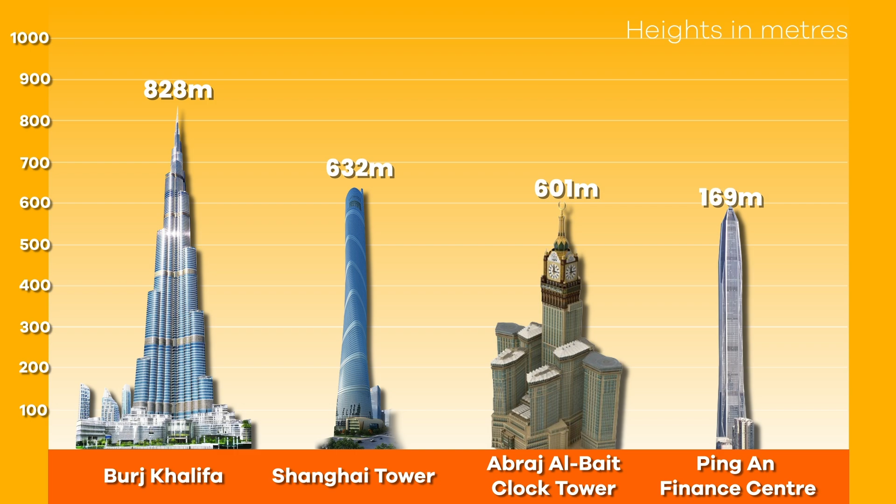The Burj Khalifa in Dubai stands at 828 meters, soaring as the current tallest. Then there's the Shanghai Tower in China, stretching up to 632 meters. Abraj Al Bait Clock Tower in Mecca holds the title for the tallest building in Saudi Arabia at 601 meters. And Ping An Finance Center in Shenzhen reaches 599 meters.

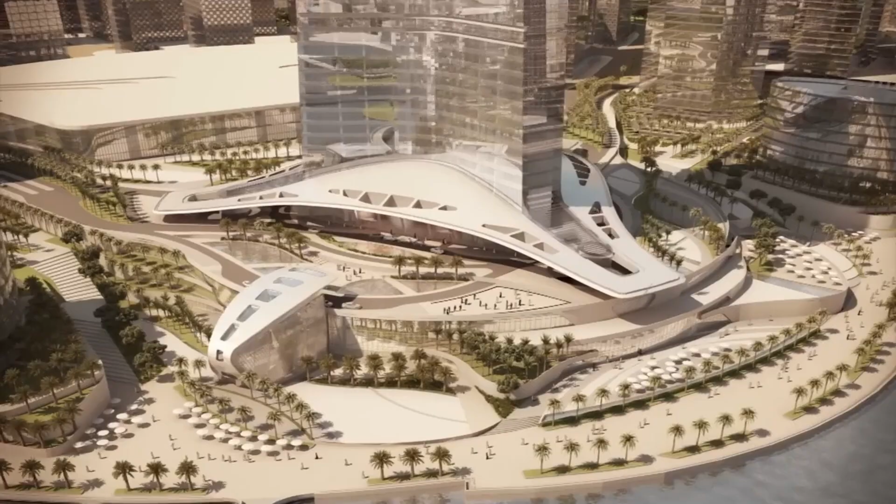Now, imagine all of that, but even taller. Saudi Arabia's Jeddah Tower is set to break every record by rising over 1,000 meters into the sky. That's nearly as tall as 3 Eiffel Towers stacked on top of each other. But here's the twist. The Jeddah Tower's construction stopped midway. What happened? Can a tower this massive even be legally built under current building codes?

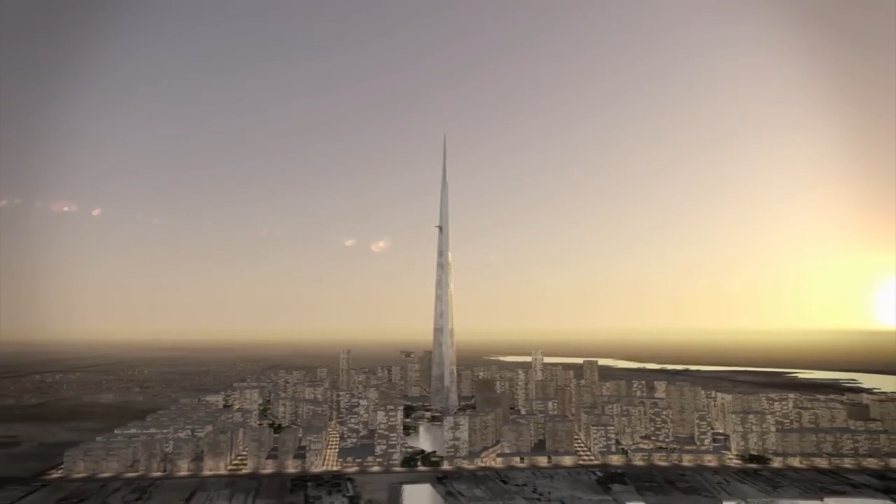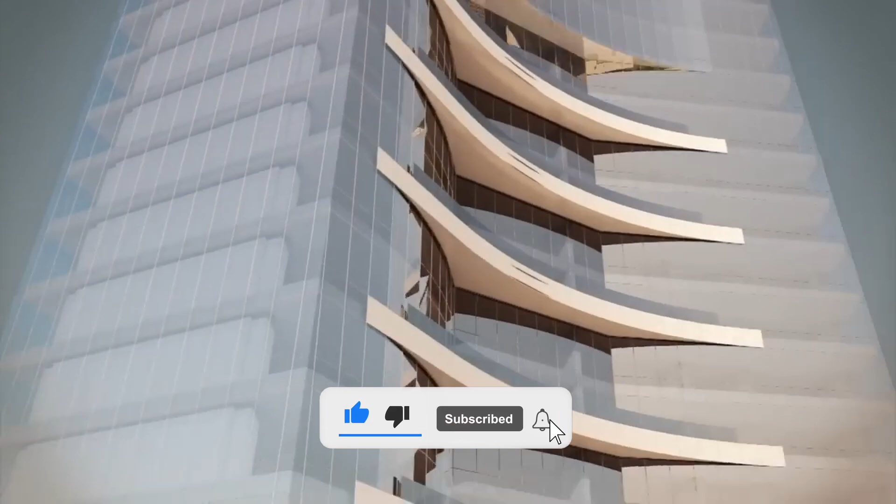Don't worry, we'll get into that because today we're diving into the rise and fall and the surprising comeback of the Jeddah Tower. So, let's jump right in and uncover why this tower could change everything or crumble under its own ambition. Let's go. Let's go back to where it all started.

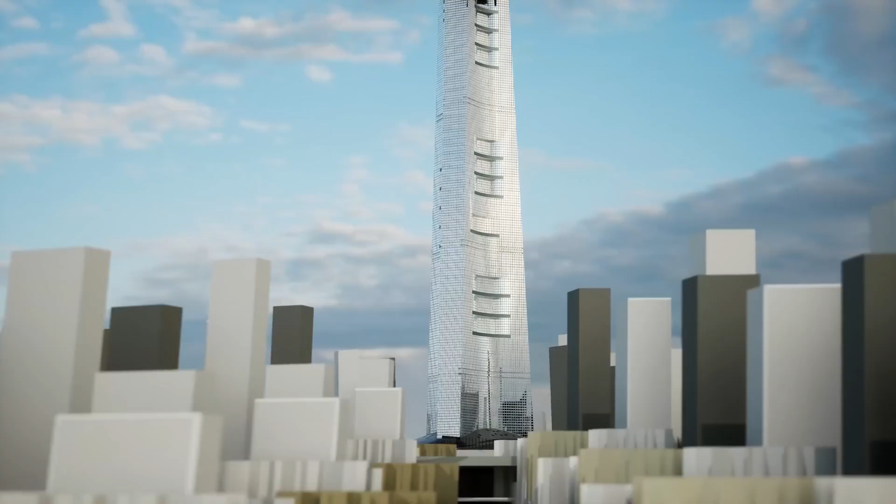It was the mid-2000s, and Saudi Arabia wanted to build something extraordinary, a beacon for Jeddah that would redefine skylines forever. Initially, whispers of a mile-high skyscraper stirred imaginations, but reality quickly set in. Soil testing in 2008 revealed concerns about whether the ground could support such an audacious height. The idea seemed almost impossible, and doubts spread like wildfire. Was this project doomed before it even began? The media thought so. Despite the skepticism, the project soldiered on.

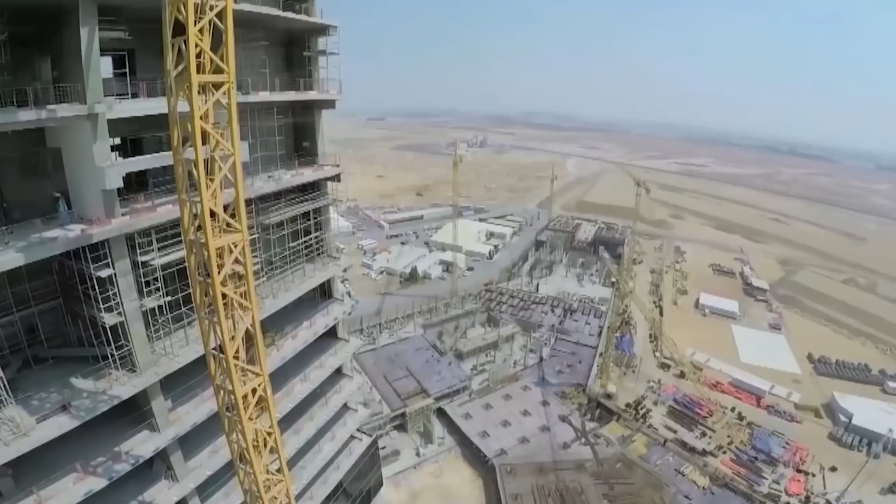By 2010, a big-name architect entered the scene, Adrian Smith, the man who helped design the Burj Khalifa, the tallest tower at the time. And if anyone could push the limits of engineering and design, it was him. His team at Adrian Smith plus Gordon Gill Architecture beat out world-class competitors to land the job. They redefined the vision, not quite a mile, but still 1,000 meters high. A kilometer into the sky. A tower that would dominate not just Jeddah, but the entire world.

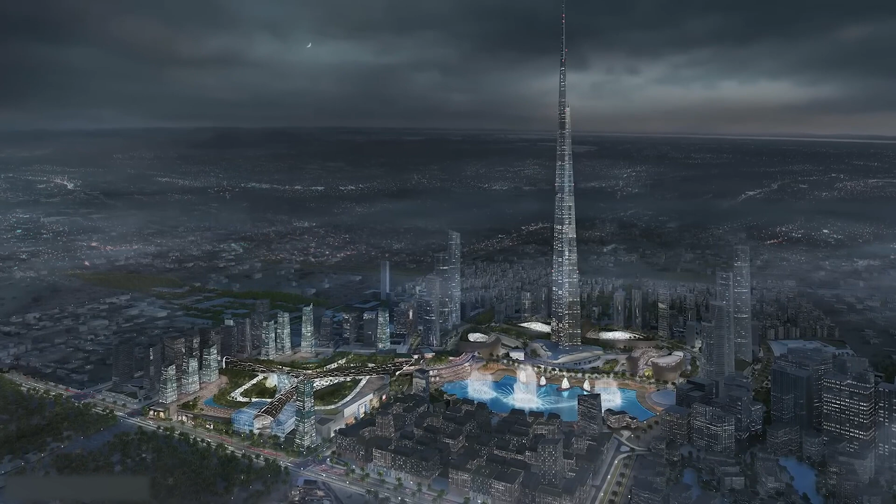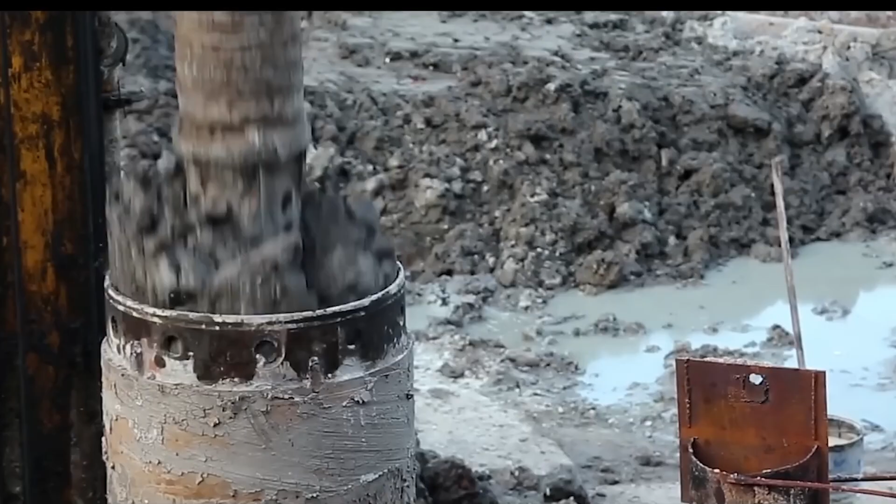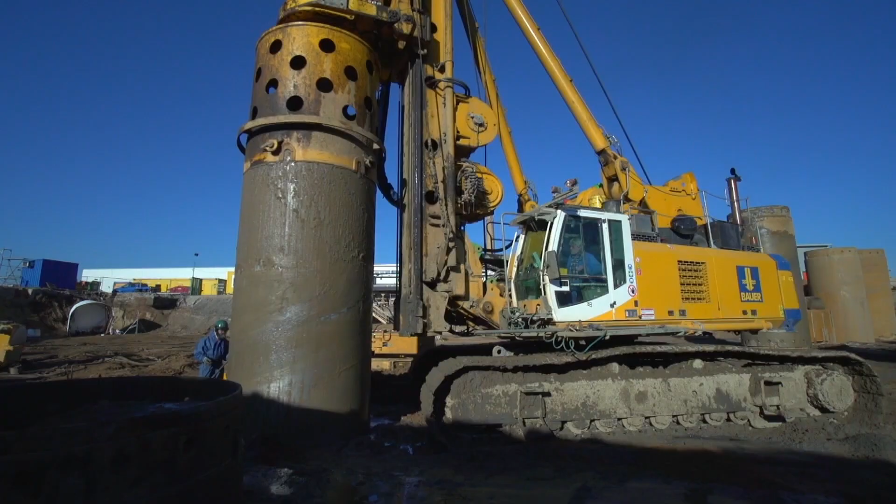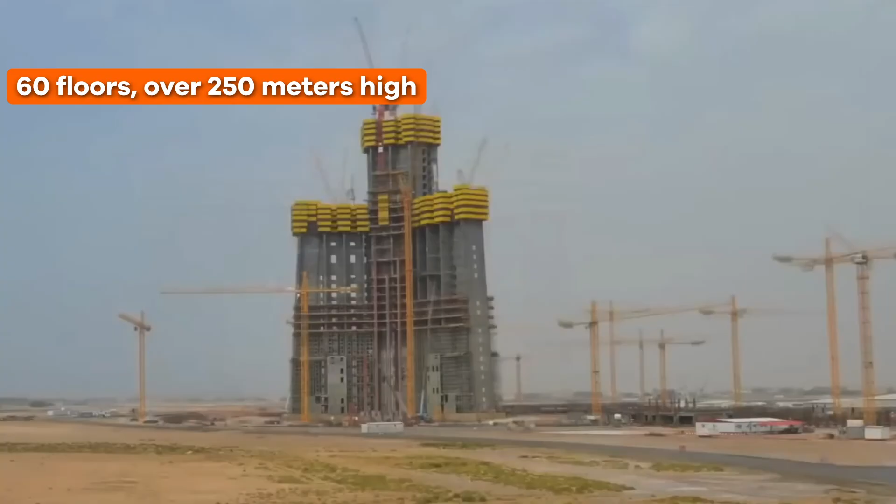It didn't take long for momentum to build. Contracts were signed. The Bin Laden Group, one of the biggest construction firms in the region, was brought on as the main contractor. In August 2011, the first concrete plans were in motion and the groundwork was set to begin. Massive piles would dig deep into the soft bedrock, designed to hold over 900,000 tons of weight. By 2013, Bauer, a German contractor, was hard at work drilling the foundation. Slowly, the dream was coming to life. And by late 2017, the central core reached an impressive 60 floors, already over 250 meters high.

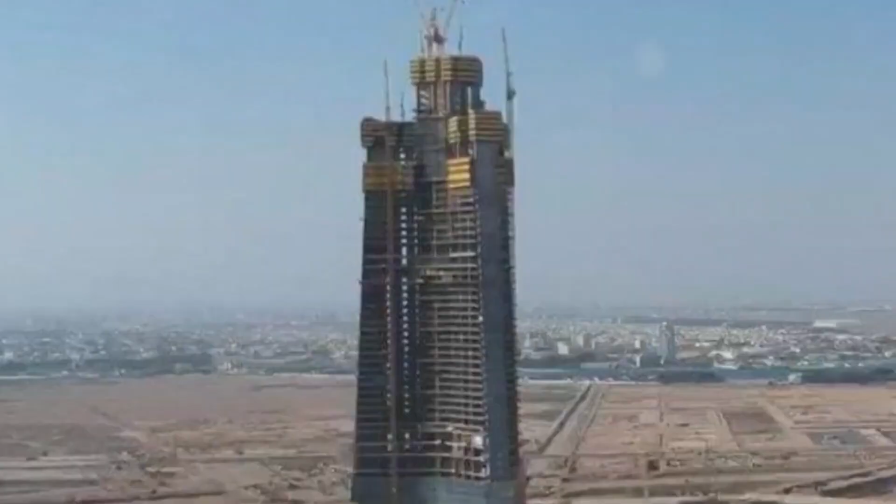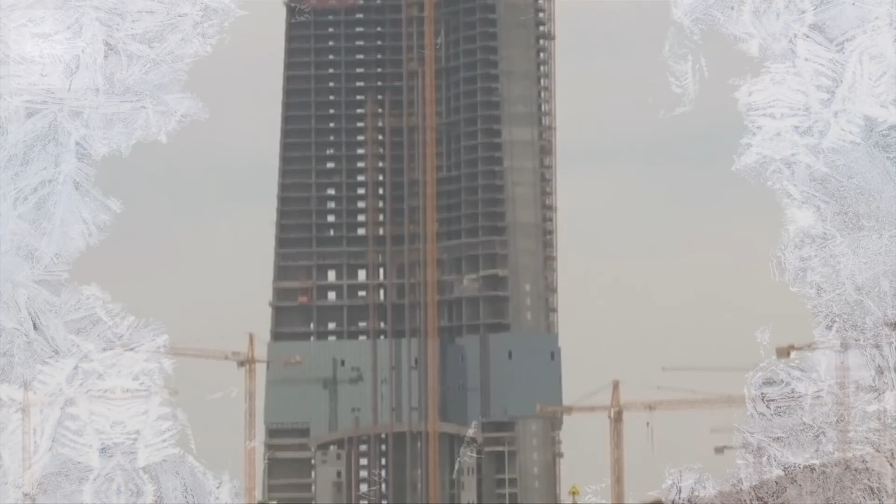But then came the first major storm. The Saudi purge of 2017 hit some of the key players in the project. Kingdom Holding Company, one of the major stakeholders, faced internal disruptions. The primary contractor, Saudi Bin Laden Group, also took a hit. Suddenly, the progress slowed. And then in January 2018, everything came to a grinding halt. The towering concrete core sat frozen, like a forgotten relic of ambition. By 2023, the Jeddah Tower became a symbol of what could have been. Could it ever rise again?

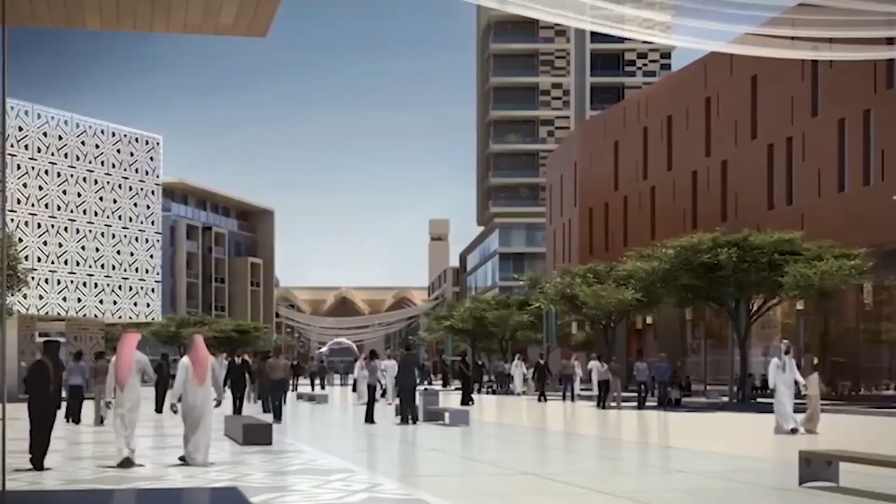Then came the unexpected. In September 2023, a spark of hope reignited. Reports revealed that Jeddah Economic City had restarted the project, calling for proposals from contractors across the globe. 14 firms from the Middle East, Europe, and China were given the chance to finish what seemed impossible. And then, just recently, in 2024, the architects confirmed it. Construction had resumed. Completion was projected for 2028 or 2029.

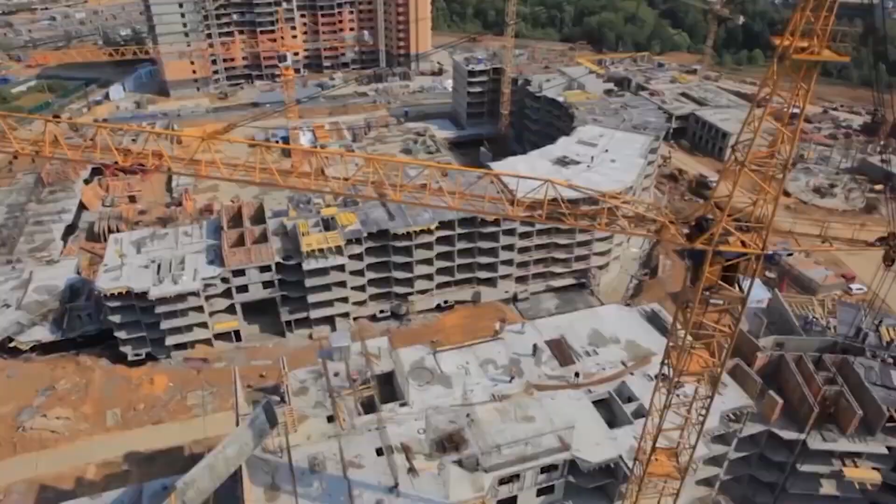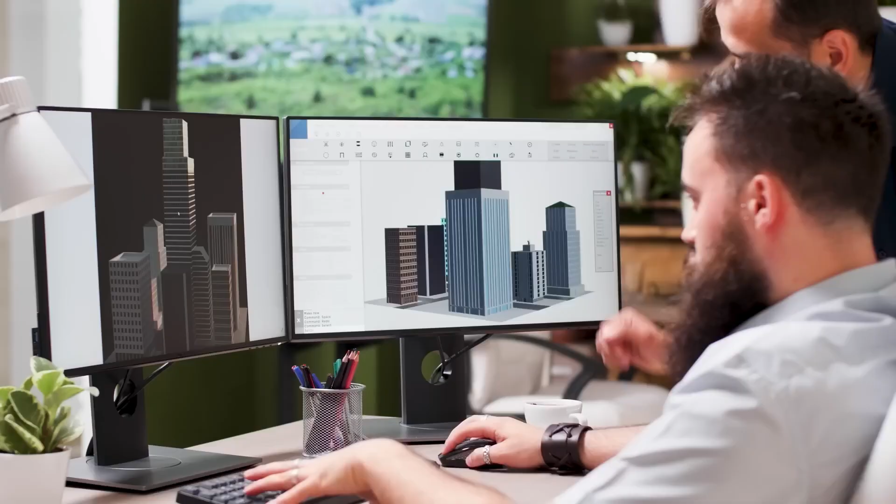But here's the twist. At its core, the project still faces massive challenges. The towering height, the engineering hurdles, and the laws themselves. Can such a skyscraper even be legally built under current building codes? What does it take to design something this ambitious and keep it standing? To understand how this colossal project even works, we need to dive into the design and technical details. And trust me, you'll want to see what engineers and architects had to pull off to make Jeddah Tower a reality, or at least attempt to.

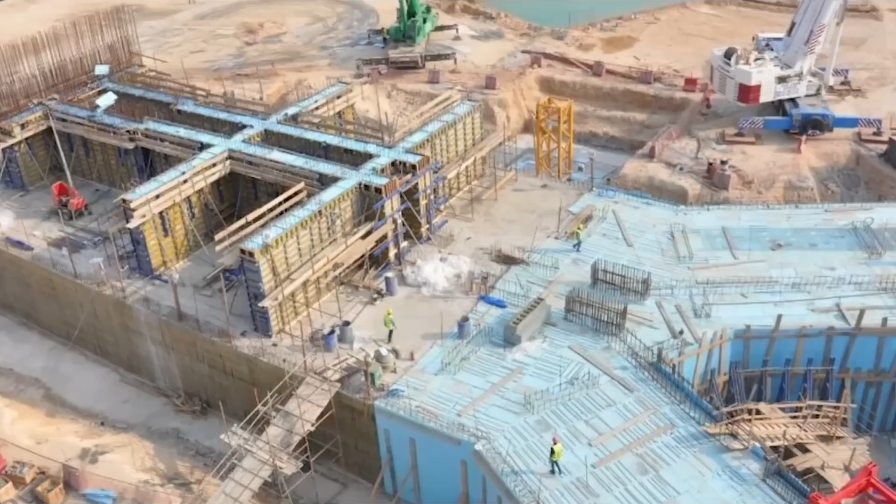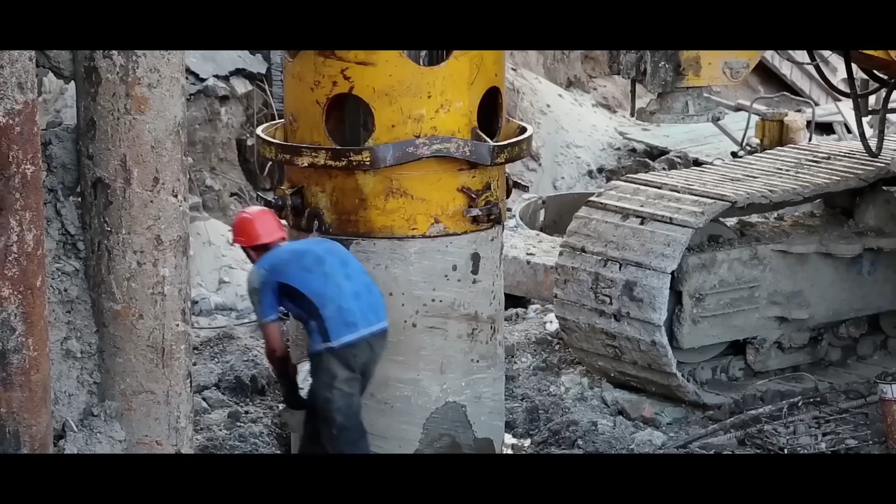Let's start with the foundation, because building a 1,000-meter tower is not as simple as just stacking concrete and steel. The ground beneath Jeddah Tower isn't exactly rock solid. Engineers faced layers of coral rock, mudstone, and soft sandstone, not the ideal foundation for a structure weighing over 860,000 tons. To solve this, they designed a hybrid piled raft foundation. Picture this: 270 massive piles, some as deep as 105 meters, drilled into the ground to stabilize the weight. These piles work alongside a gigantic concrete raft that's over 4.5 meters thick.

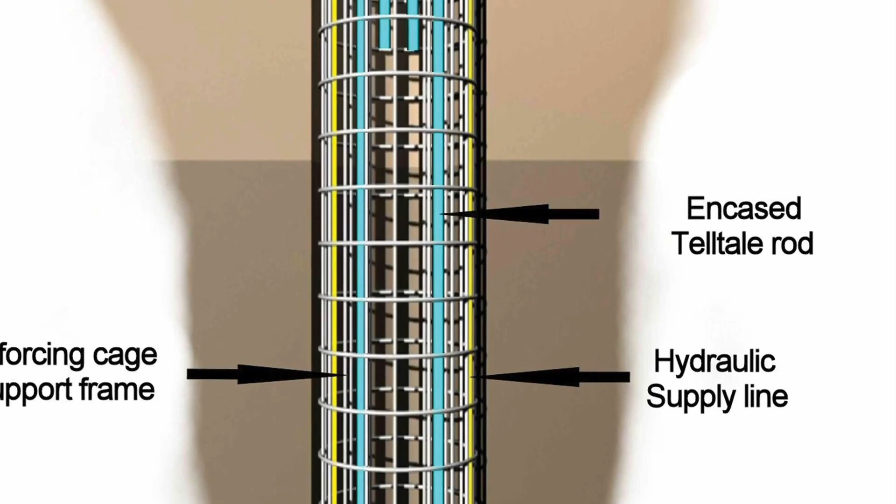It's like planting a giant stake deep into the earth to stop the tower from sinking unevenly. And yes, engineers used advanced technology like the Osterberg cell test to ensure everything stays in place.

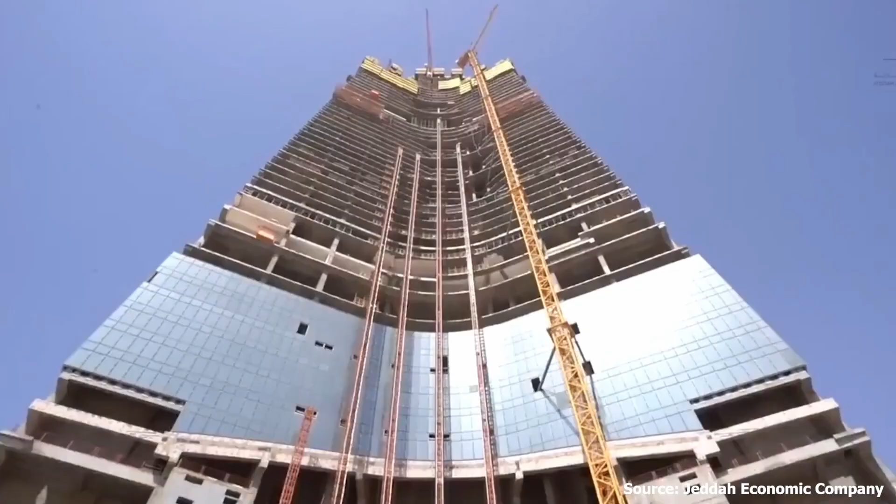The materials used in this tower are also groundbreaking. To combat the harsh Saudi climate and immense weight, the concrete has to be extremely strong. Tests confirmed it could handle up to 90 megapascals of pressure. For reference, that's several times stronger than the concrete used in most standard buildings.

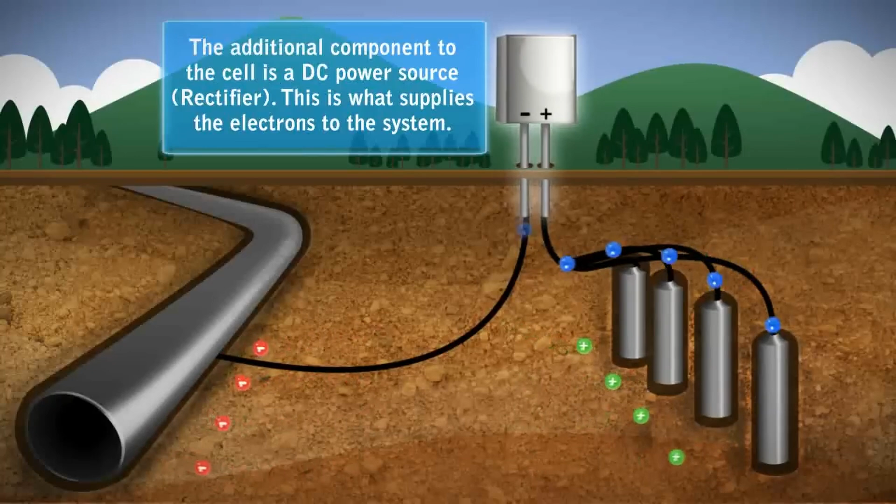They even added a cathodic protection system to the steel bars inside the piles, preventing rust and ensuring the structure could last for over 100 years. Now think about it, a building designed to survive for a century. But it's not just about the foundation.

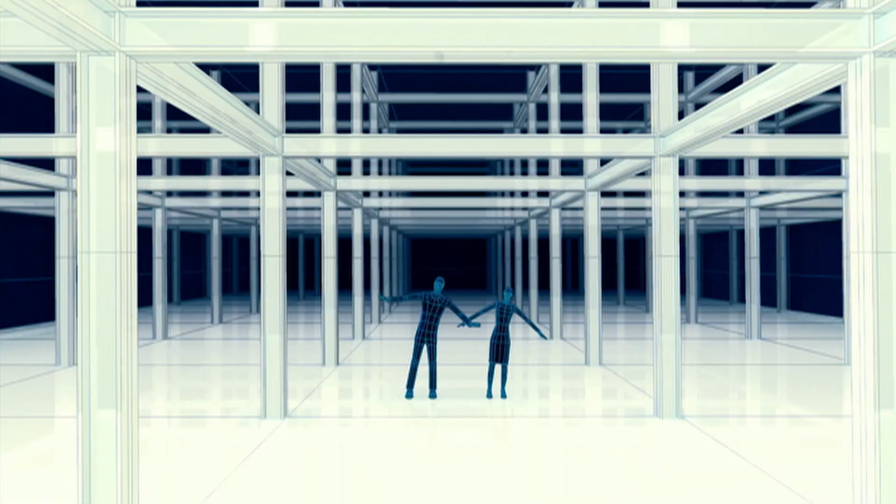Jeddah Tower's design has to fight against two main enemies: wind and gravity. At 1,000 meters, wind doesn't just blow, it roars. Normally, wind causes buildings to sway, making people feel dizzy on the upper floors. To stop this, the architects created a smooth, tapering exterior. Instead of jagged edges, Jeddah Tower has a sleek, sloped shape that confuses the wind. This reduces dangerous wind vortexes and keeps the tower stable.

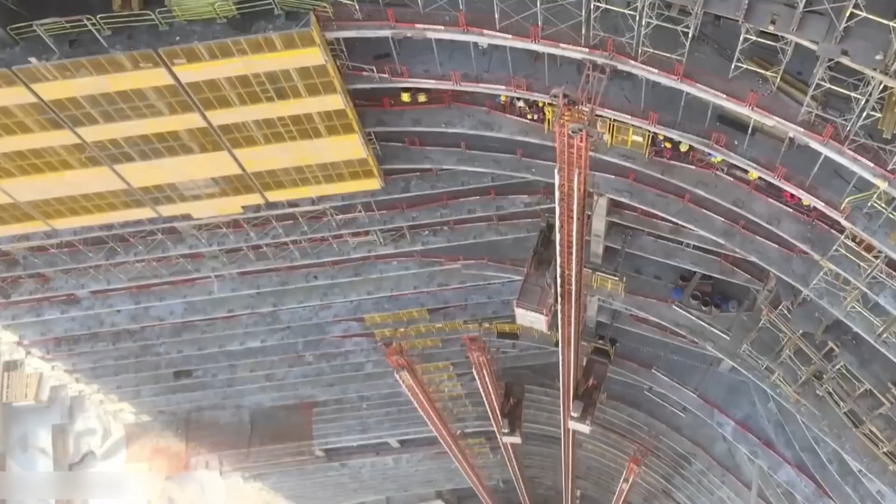And inside, the tower uses shear walls and a reinforced concrete core to prevent the structure from bending or twisting under stress. Here's another crazy challenge: elevators. How do people get up 200 floors without wasting space on huge elevator shafts? The solution? A mix of double-deck elevators and 3 sky lobbies. No single elevator goes all the way to the top. Instead, passengers switch at designated floors, saving energy and space.

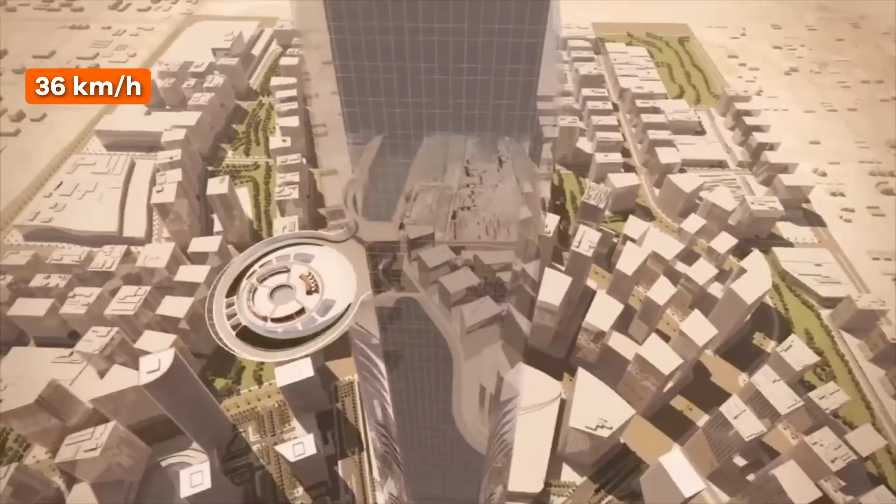The Finnish company Kone designed special high-speed elevators that travel at 10 meters per second. That's over 36 kilometers per hour. Imagine taking an elevator ride at the speed of a car and still feeling safe.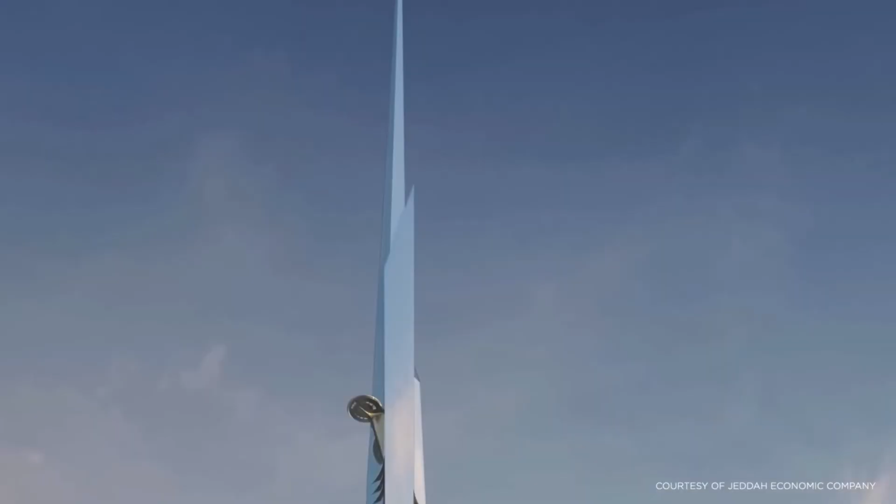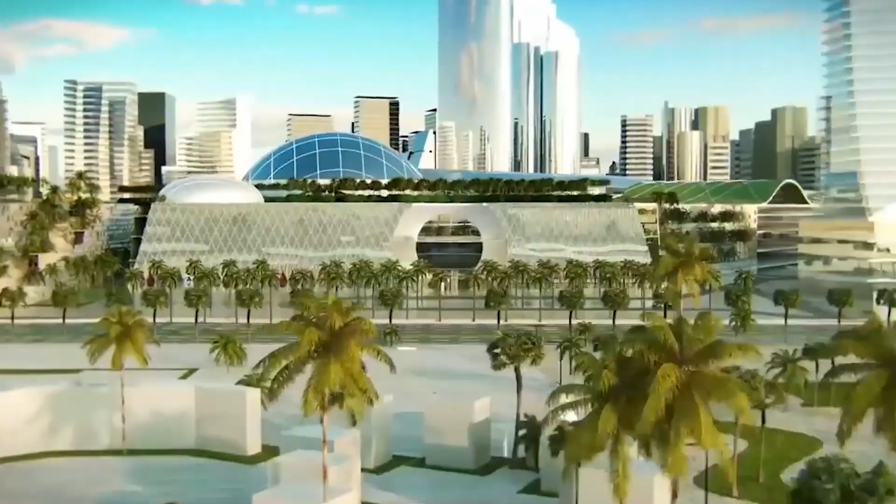And what about heat? At a kilometer into the sky, the air temperature drops significantly. The designers took advantage of this natural cooling, just like Burj Khalifa. They also oriented the tower so no single face is directly exposed to the harsh sun, reducing the energy use of air conditioning. On top of that, the tower will collect condensate water from the AC system to irrigate surrounding greenery. It's a small step, but it shows how much thought went into sustainability.

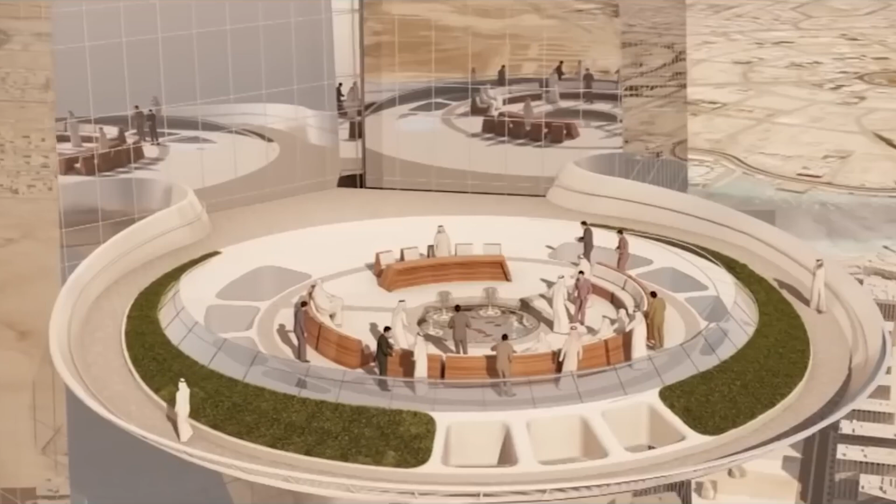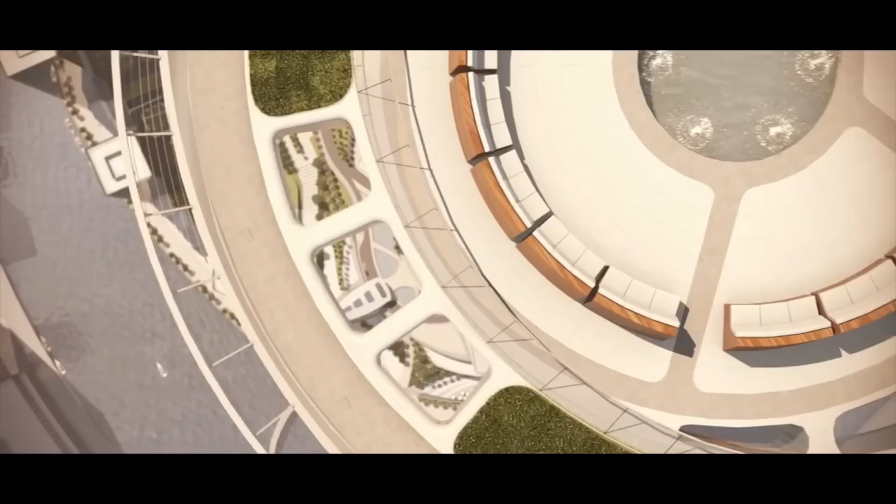The crown jewel of Jeddah Tower is its sky terrace. Positioned on the 157th floor at over 610 meters above ground, it offers jaw-dropping views of the Red Sea. Originally designed as a helipad, it had to be scrapped because the air at that altitude made helicopter landings nearly impossible. Instead, it became a private outdoor space for the penthouse floor, a luxury only a handful of people in the world will ever experience.

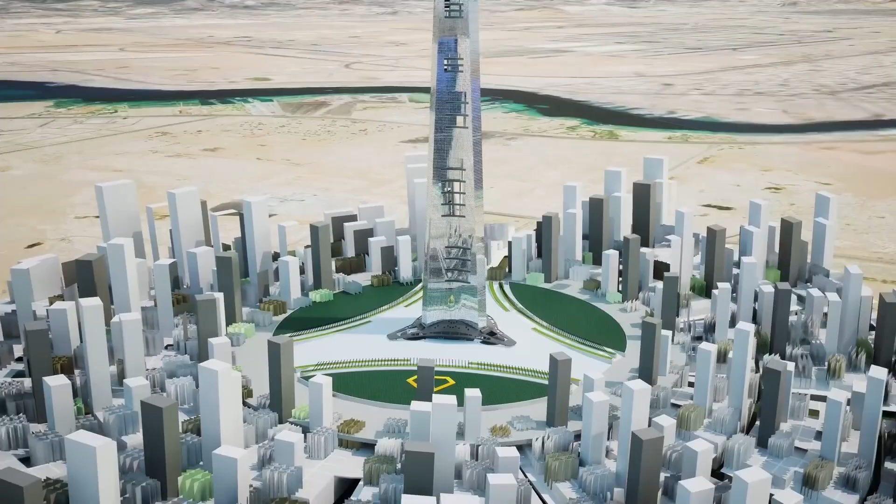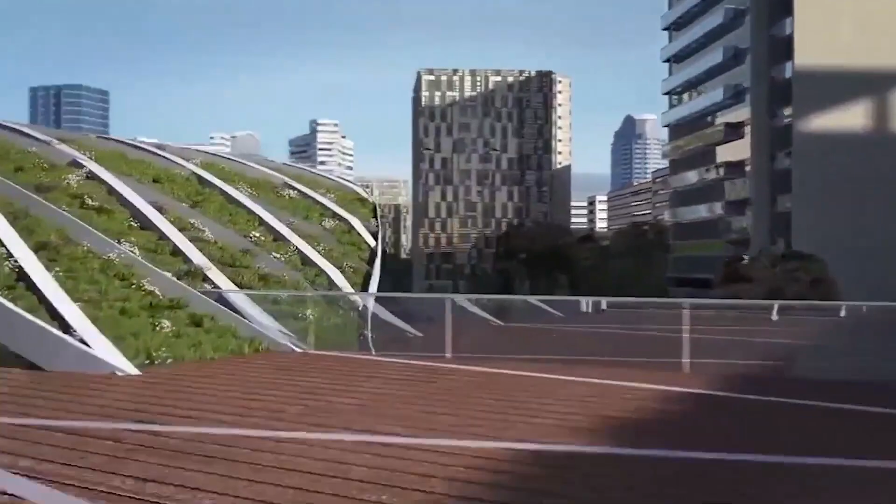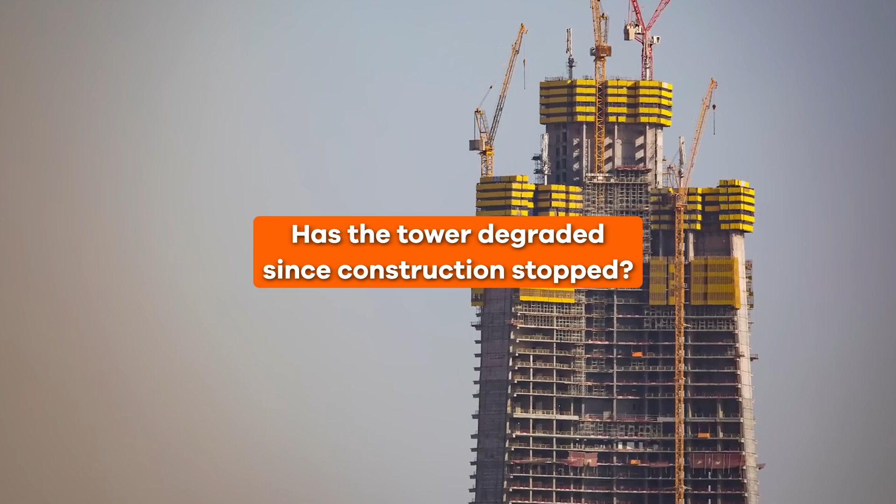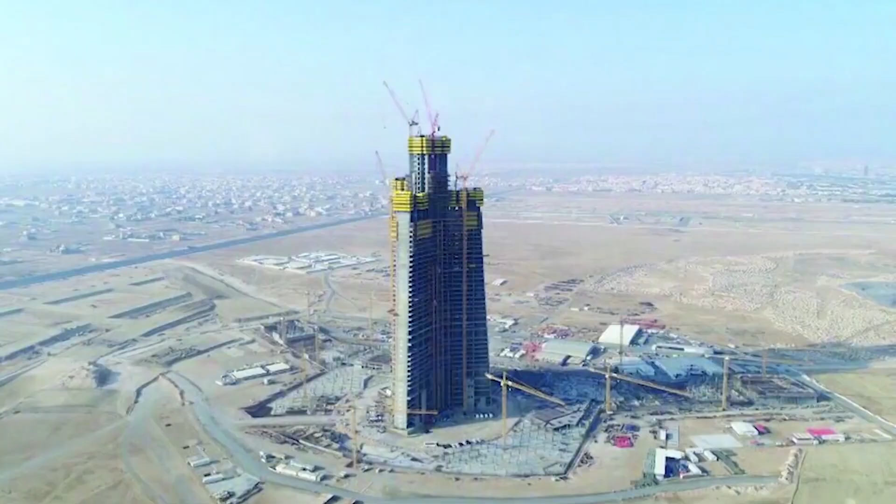Still, the delays have left people asking, has the tower degraded since construction stopped? The good news is that the concrete core and foundation are incredibly durable. Engineers designed the structure to handle long pauses in construction. That's why, even after years of sitting incomplete, the tower hasn't shown signs of collapse or decay. But the challenge now is to restart work efficiently and safely. And yes, when complete, Jeddah Tower is expected to stand for over a century. Proof of human engineering pushing the boundaries.

So, could taller towers be built in the future? Technically, yes. Engineers say it's possible to go even higher, but the costs, materials, and challenges would be unimaginable. For now, the Jeddah Tower remains at the edge of what's possible, a true engineering marvel.

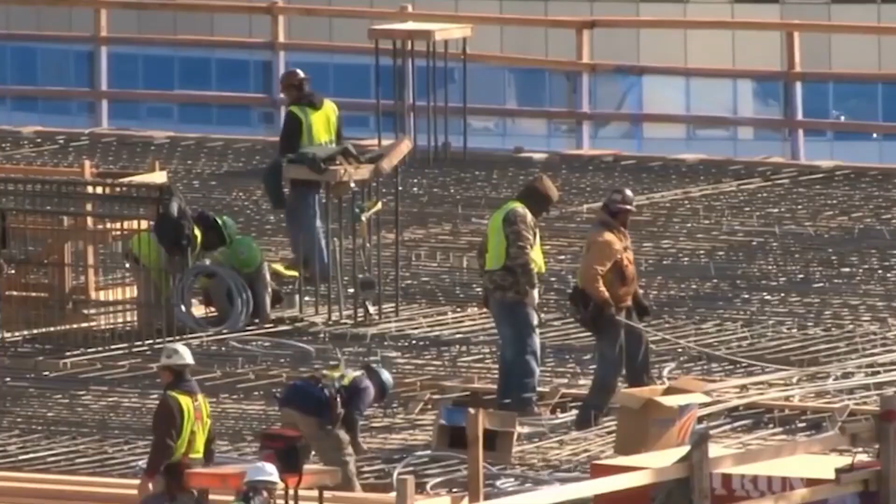And there you have it, the incredible details of how Jeddah Tower is designed and built. From its massive foundation to its sleek, aerodynamic design, it's a symbol of ambition and progress. But what happens next? Can Saudi Arabia finally finish what it started? And will Jeddah Tower truly stand as the world's tallest building?